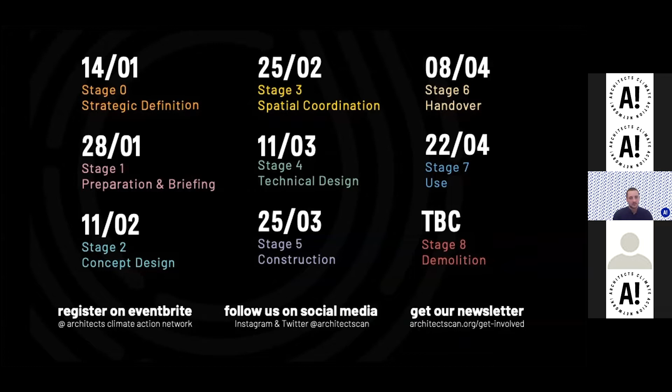For context on today's event, here's a quick reminder of Stage 4 technical design, taken from the RIBA Plan of Work. In Stage 4, the design team further develops the Stage 3 developed design in sufficient detail for tendering and construction assembly activities on site. If the design activities are to be undertaken by a specialist or subcontractor, then the design will need to be developed to a level that allows for this, and the design team may have obligations to check this information or respond to the design queries as set out in the design responsibility matrix. The technical design will include the required construction details, choice of materials, and standards of workmanship.

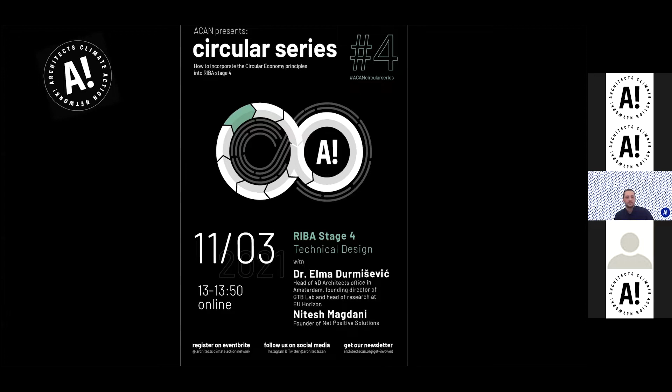So for today's event, we're delighted to be joined by Dr. Elma Durmisevic, an architect who's the head of 4D Architects in Amsterdam, where she has developed 2 EU circular building demonstration pilots, which demonstrate the implementation of reversible circular building design approach in real construction projects. Elma is also the founding director of the Laboratory for Green Transformable Buildings in the Netherlands. This is a platform for circular buildings. She is the founder of Green Design Centre for Southeast Europe and published the first PhD dissertation and book on design for disassembly in Europe. Over the course of 20 years of research with numerous EU projects, Elma has developed tools for measuring circularity and reversibility, which are integrated into the EU guidelines for designing circular buildings. Elma led the EU Horizon 2020 BAMB, Buildings as Material Banks, reversible building research, and is a member of a number of juries and scientific committees.

And our second speaker, Nitesh Magdani, who has over 20 years of experience working across the areas of design, construction, and property development, acting as architect and sustainability expert. He has also had leadership roles at the Royal BAM Group and the Supply Chain Sustainability School. Nitesh works with clients and stakeholders to create solutions towards a net zero and circular economy future. Nitesh developed a circularity economy strategy at BAM, including BAM's engagement with the Ellen MacArthur Foundation, co-authored a publication on circular business models, and has been influential in several circular economy projects, both in the UK and the Netherlands.

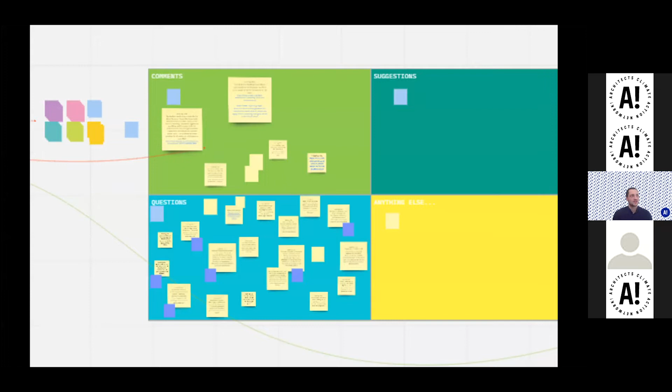Thank you for inviting me to speak at this event and for the time. It is restricted time, so I'll just start immediately with the talk on the subject and ideas I want to share with you and the audience today.

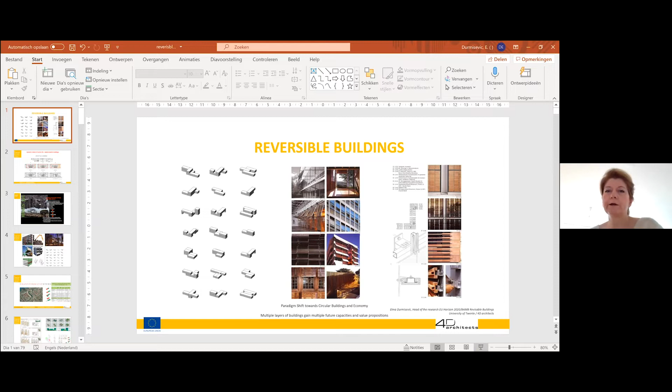So I want to talk about reversible building, as I see that as the new generation of building, the way we should be looking at the built environment if we want to move towards a circular building and circular world.

For me, the reversible building brings a new perception on how we see the built environment. Conventionally, buildings have been designed as static structures, designed for one end of life. That means with every iteration or adaptation, demolition needs to take place.

The reversible building, in contrast, brings a view of a building as a dynamic structure, built up of exchangeable parts and modules which can be recovered, reused, and recycled in new cycles. It sees a building as multiple layers, gaining multiple future capacities and value propositions, which I'll present in these 15 minutes.

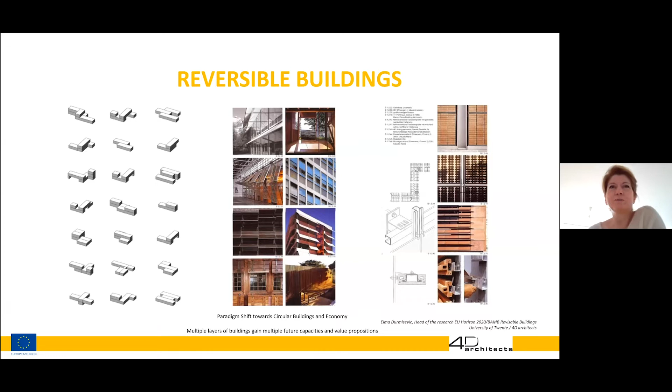I'll try to be sharp. The reason I've been fascinated with this approach, and have been working on flexible, transformable, reversible buildings - we now call them circular buildings - is the fundamental mistake and error I think we've built into our design of buildings and construction.

We see buildings and design them as static structures, but the very purpose of a building is to provide an envelope and comfort for human activities, for human life. Somehow we think all these ever-increasing changes of life and ways of living can fit into that once-designed structure, which is not designed to be recovered, adapted, or have materials reused.

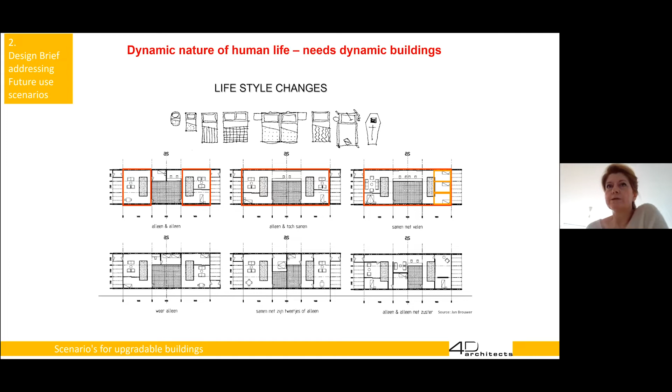I won't go through these details, but I'm sure you all know this results in a huge negative impact on the environment and on economics in the end as well.

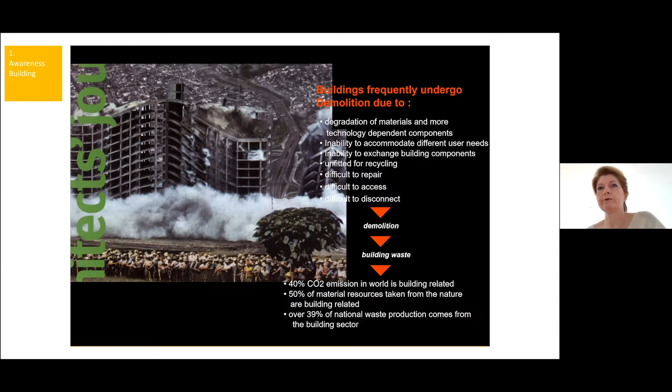So that's what we want to change. That's why we want a new approach where, for me, if I see demolition happening, I'd say there is a design mistake. Demolition is a result of a design mistake. It is at the design table where we define how the building will look, how its configuration will be put together, and how the materials will end up in the future.

If we didn't think through carefully about the future scenarios for buildings and their materials, then demolition will happen. And I hope with all the tools we've been developing in the last decade, we can help take this design mistake away from the tables.

In the future, I think the nice view would be to see the built environment as an upgradable, dynamic environment, where construction is not organized around demolition of buildings anymore, but around transformation and upgrading of buildings, reconfiguring its parts and bringing them back into the built environment again. So that's kind of where we would like to go.

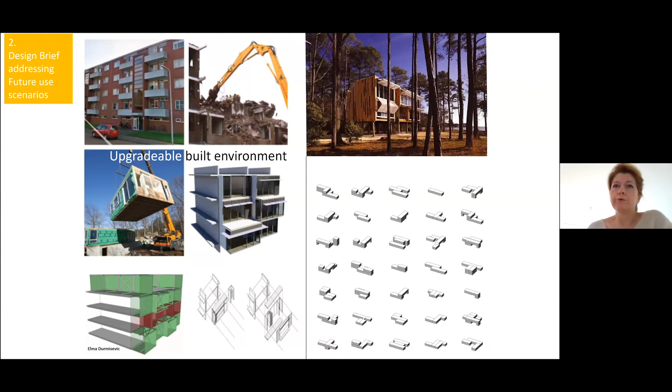But in order to do that, we need changes on different levels, starting from clients as well. When we receive a design brief, we would need to ask clients to come up with a number of design or use scenarios. In this case, I'm showing one project we did in the Netherlands with a Housing Corporation.

We asked the Housing Corporation to provide us a design brief with a number of possible use scenarios, which came out of demographic studies of the city and area, where they looked into future needs and scenarios and what kind of families will be living there. Based on that, they came up with 4 scenarios.

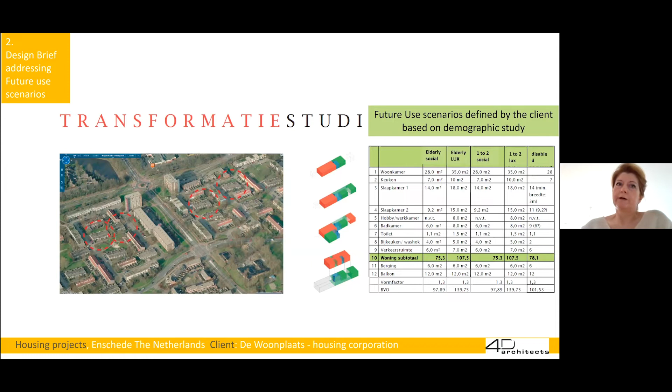When you have options for the future that the client also looks at carefully, you can start developing a system for the building that can live longer, that can accommodate these 4 different scenarios, and does not have to be demolished and wasted, but can be adapted for a next user.

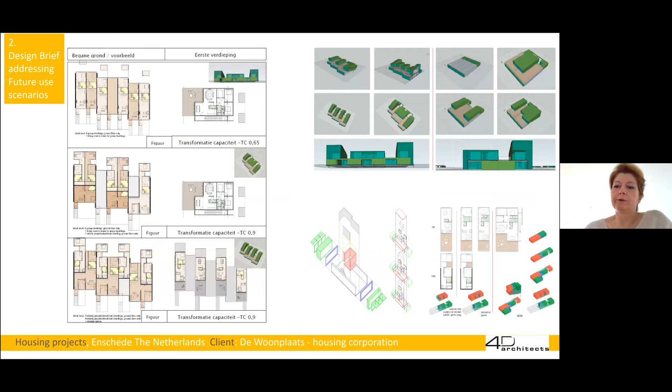But the same counts for the technical parts and systems. That means that in the future, we would need to design systems or units for buildings which can accommodate different techniques, answer different energy performances, and be made and filled in with different materials. So reconfigurable systems, as in this prototype we've done also for extension units.

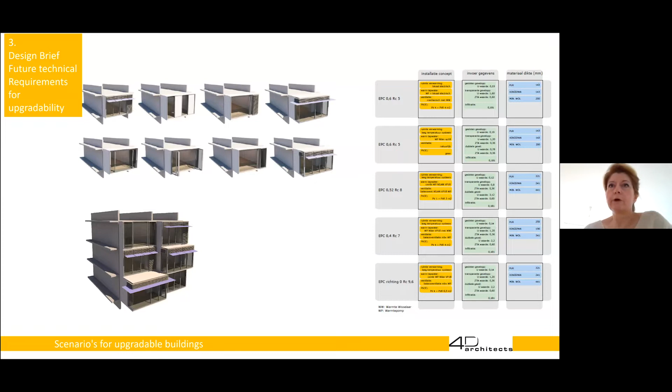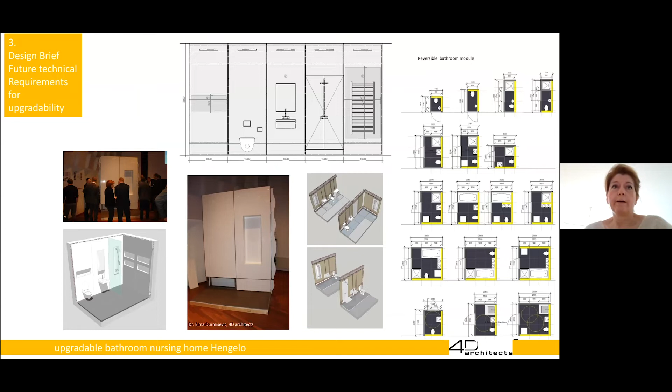In the Netherlands, same counts, just staying on the technical level of systems. Bathroom system, for example, again designed for a nursing home based on a number of scenarios, how the bathroom can be changed over the use of the building as a nursing home, so that you can adapt bathrooms without demolishing them and bringing in new materials.

This brings on new tasks for architects and designers, and the task would be to ensure, in my mind, multiple value propositions of a building through design of multiple dimensions of transformation. And these dimensions are supported by high disassembly and reuse potential.

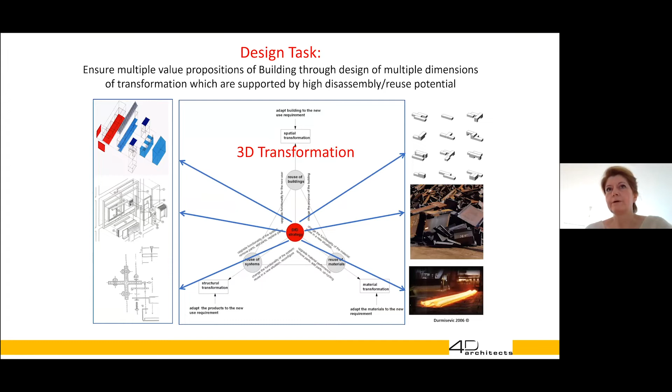That brings me to the 3 design dimensions that I think designers and architects should be looking at when designing future buildings. I call them 3 dimensions of reversibility: the reversibility of space, this adaptation of space; reversibility of structure; and reversibility of material as a 3rd dimension of reversibility.

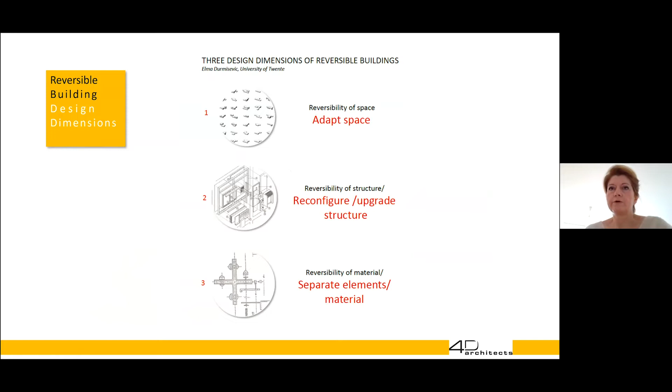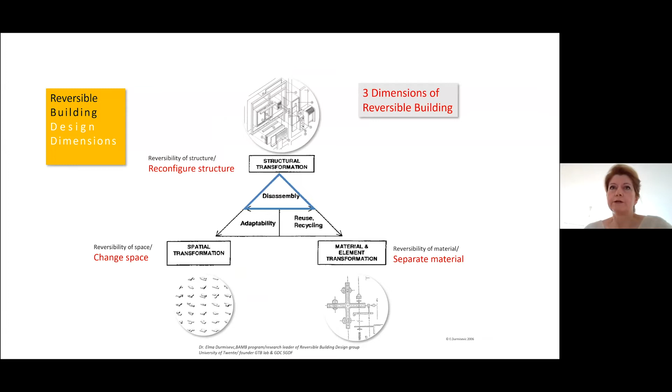These 3 dimensions of reversibility are structured around the core of circular and reversible building, an enabler of circular building, which relies on 2 key pillars: adaptability and reuse, supported by disassembly. This is the main core, and the way we as designers answer these 3 key elements that enable circularity—adaptability, reuse, and disassembly—will inform us on the performance of the building and system in the future.

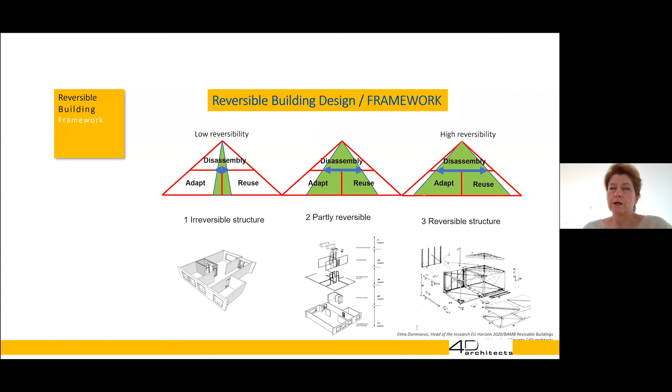By analyzing and assessing these 3 key elements, we can structure the whole built environment and group it into three general groups, from being irreversible to reversible. That was a framework that I developed also for a number of European projects to help move further.

When we talk about future circular buildings, on one hand, we need to design them. Thus we need new design guidelines and protocols. On the other hand, once we have designed and built buildings, we also need measurement tools in order to measure the performance of these new buildings. Because we are talking about new buildings, we don't have means to measure their performances, so we need to develop tools to measure these performances.

So that's why I developed a kind of reversible building toolkit with a couple of basic tools, which I thought were essential to start with. On one hand, developing protocols and design guidelines that will help designers from initial stages to the end to design more circular, reversible buildings.

On the other hand, to support the design, especially the preliminary design phase, the transformation capacity tool has been developed with a supported virtual simulator. It is BIM-based, and technical reversibility is more part of the technical design phase and final technical design phase, which is supported with a reuse potential tool, which also assesses the performance of the design in the end.

So you can improve your design when using these assessment tools. So this is the basic design toolkit.

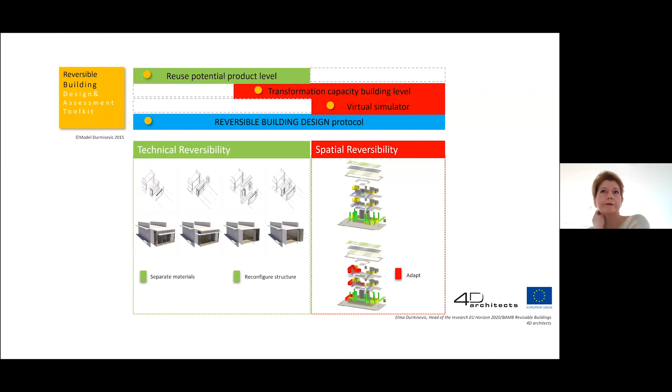When I map it against the three dimensions of reversible design, the first one, transformation capacity, addresses the design of adaptable spaces. It measures the ease to adapt the building and change the function without demolition. It's more on building level.

The other one, reuse potential and reversible BIM, which I'll mention shortly in this presentation, helps go through the final and technical design stages in terms of assessing the design solutions and improving them where needed.

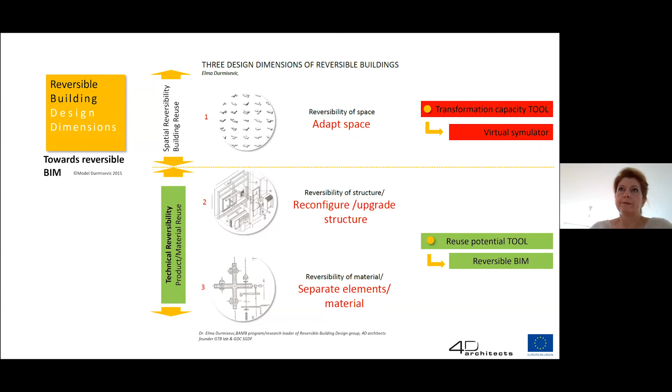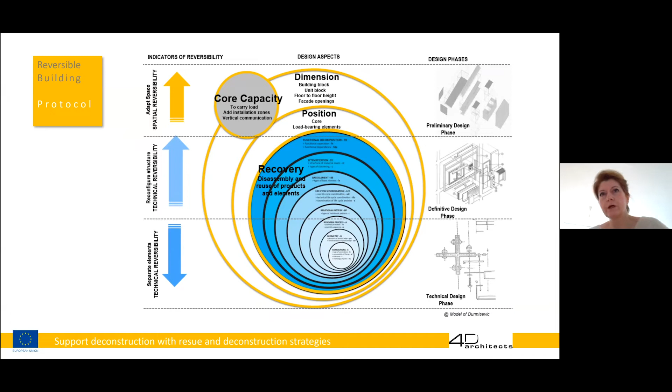The second part, as you've probably seen in one of the slides, is that the building has its spatial parts - I call that spatial reversibility. We need to pay attention to that. And the technical part, what makes the building in the physical sense - in terms of circularity we talk about technical reversibility of the building.

In order to design these technical reversible systems and products, there are three key design domains that the design of each configuration of a product will go through. Those are functional, technical, and physical design domains.

When we want to design for disassembly and for high reuse potential, I developed a model which analyzes three types of dependencies that occur in every product structure. Those are functional dependencies, technical dependencies, and physical dependencies.

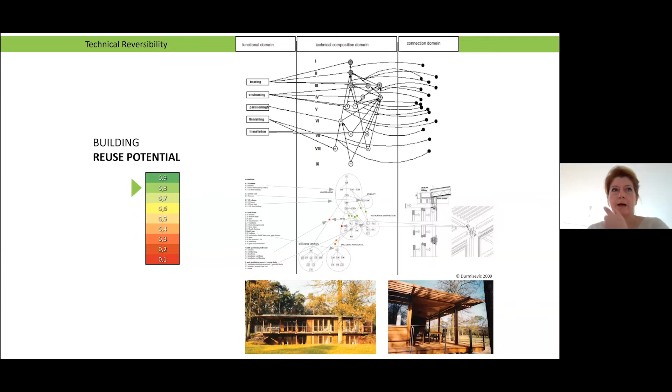The schemes you see here show general information on what kind of analyses take place in these domains. Every product - whether we talk about a building as a product or system, or a component as a product - has these three domains, and within every product structure, or configuration, a number of dependencies occur between parts. These dependencies, if not dealt with properly during design, will result in dependencies that need demolition in the end.

Based on that, I defined 8 design aspects that are related to each of these three groups: functional, technical, and physical dependencies. So where do we need to look, and how can we deal with that?

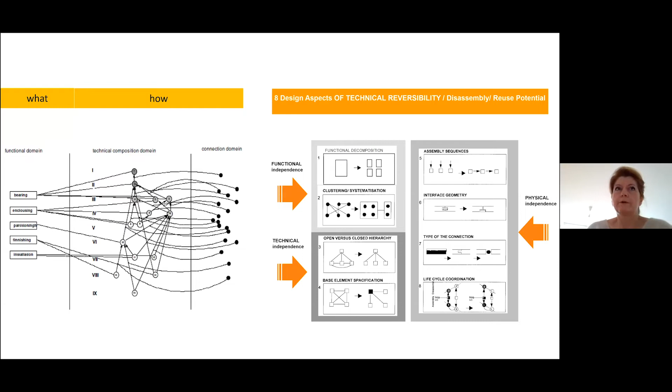I'll go through these few design aspects very fast. But on the other hand, these 8 design aspects are also indicators of reuse potential and technical reversibility - that means by assessing each of these indicators, we measure the reuse potential of the building itself.

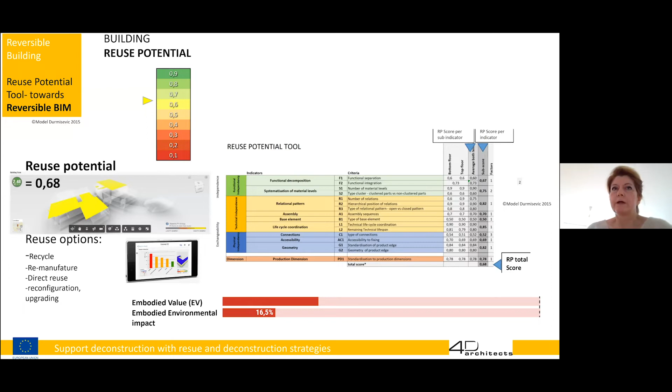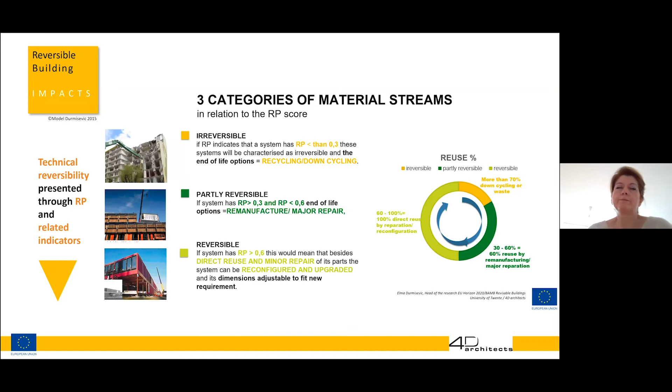The number for reuse potential, between 0.1 and 0.9, is related to the end-of-life options that an element will have. So if the element has a reuse potential of 0.3, that means it will be recycled, for example. So the reuse potential maps reuse options and strategies for materials based on the whole life cycle of the material. That's part of the evaluation.

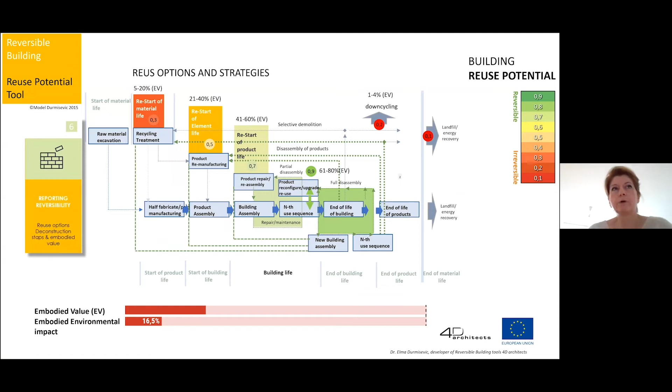Now looking at the 8 design aspects, I'll just run through them. Sometimes visualization helps - something stays in your mind.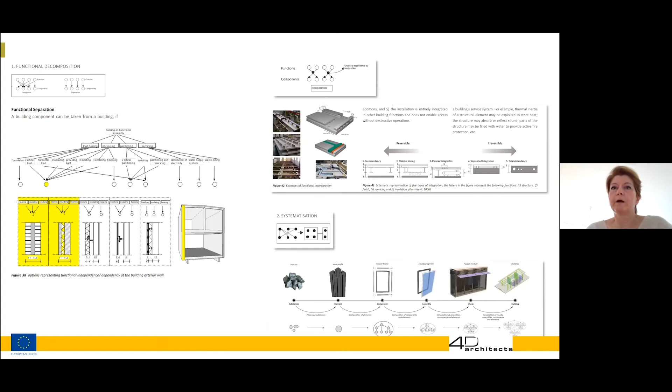When I talk about functional decomposition, obviously the separation of functions on a building level, but also on system level, is something that needs to be taken care of, but also the integration of functions in terms of installation surfaces and structure. Systematization is very much about modularity - how modular is a building and on which level.

The hierarchy and hierarchical pattern which emerges within configurations is a very important part, which plays a key role when we think about taking a part out. As you can see on the left-hand side in the upper corner, a very complex diagram where all elements are interconnected - mainly existing buildings have these kinds of complex diagrams. It means if you want to take one element out, you have to cut 5 or 6 connections - the reason why we demolish buildings.

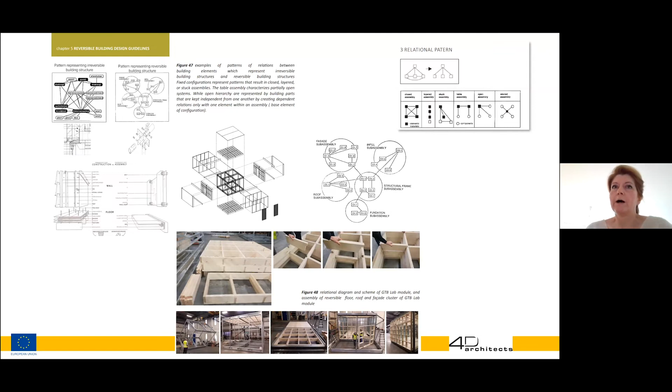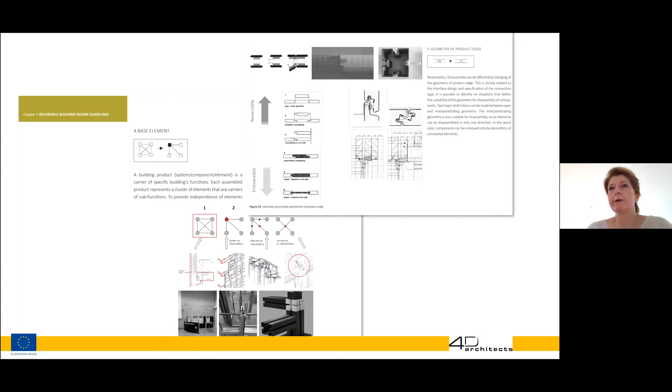The base element specification really helps sort out this complex relational diagram and define a base element in your configuration system that will be intermediary between other elements which have different functions with different life cycles. Product edge geometry is another indicator, which will also sometimes be a barrier for recovering an element without demolishing it or damaging it.

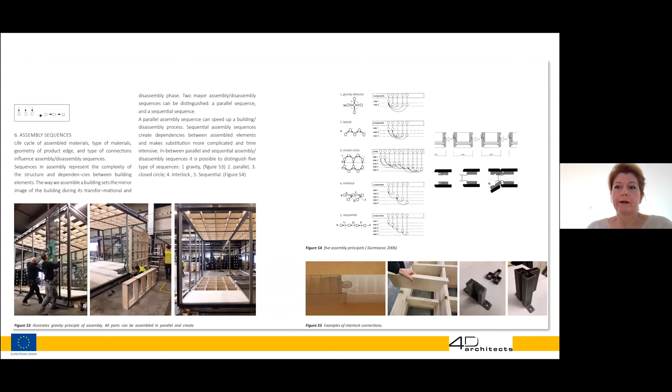Assembly sequences also matter - very often we don't think about that, but the way we design connections impacts whether the configuration is assembled in sequential order, meaning if you want to take one facade out you need to remove 15 elements, or whether it's assembled in parallel order. And the type of connections, from reversible to irreversible, also matters. As a designer, going through these 8 indicators, we can create a net graph indicating which aspects can be improved if we want higher reversibility in a building or system.

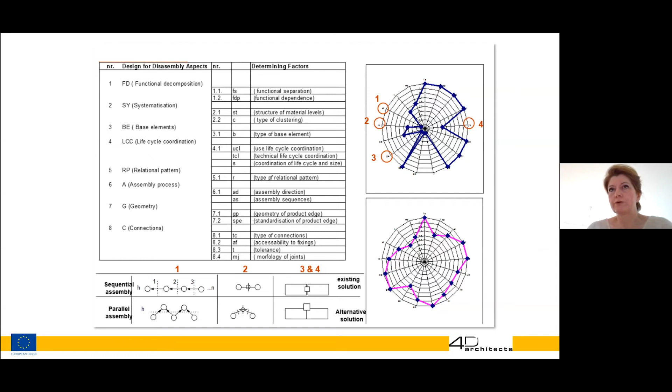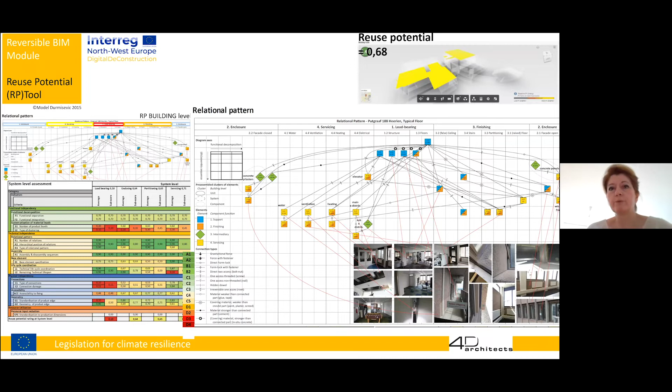This approach is used on one hand as a design support tool, but on the other hand as an evaluation tool. These indicators are used to create a measurement tool to measure dependencies and reuse potential of elements in the building. The 8 indicators, listed here on the left-hand side, have a number of sub-indicators, and the assessment is optimized in Excel to measure reuse potential at building system and product level. It's quite a complex process, I can tell you that.

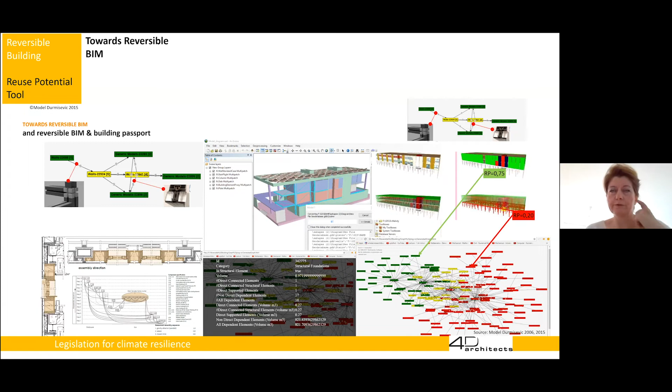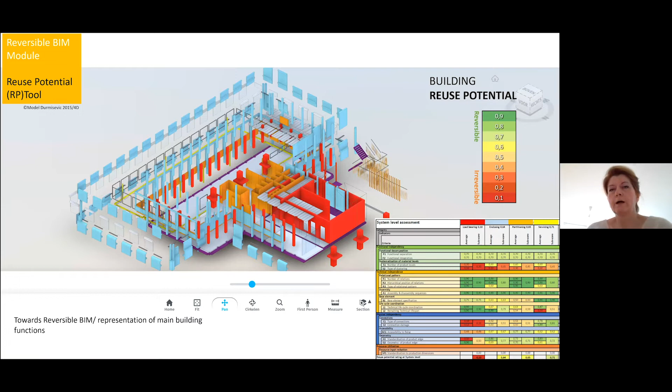That's the reason I started integrating this assessment process into BIM and developed something called Reversible BIM. I still work on it, but we've tested it on a couple of buildings. What the Reversible BIM does, basically - we tested it on an existing building by scanning it and getting point cloud files, then creating the Reversible BIM according to the reuse potential methodology, functional decomposition, and so forth. This is the basic model we use to add plugins which we developed as well.

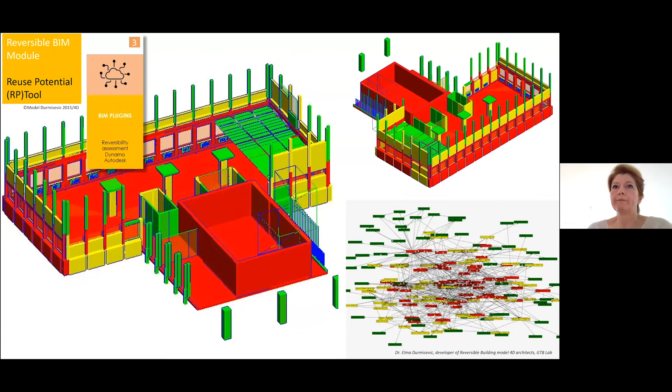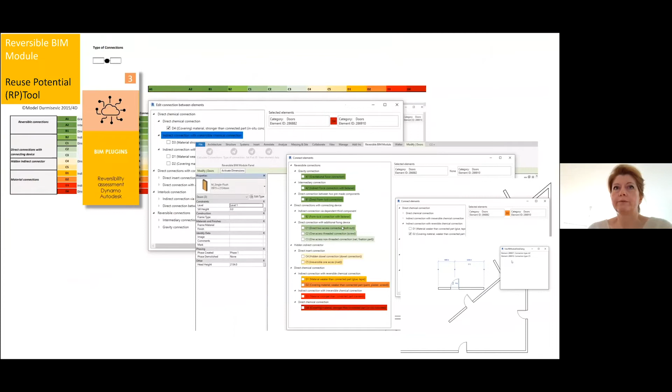Plugins analyze the number of connections within elements and color them - elements with up to 3 connections are green, more than 7 are red, and that's presented in the model itself. We also developed another plugin for connections to analyze the types of connections, also related to color coding, all tied to the reuse potential methodology I mentioned previously. Putting it all together, reuse potential is calculated and color-coded files are created for viewing.

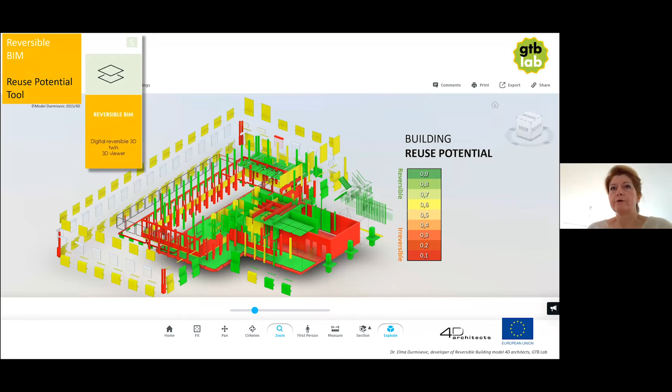When you click on each element, you get your reuse potential scoring, which helps give an idea of how many elements in a building have high reuse potential. It's quite interesting for construction companies - they can create deconstruction strategies based on this analysis.

But for architects in the future, we're thinking of developing a 3D library of BIM objects, so elements with high reuse potential can be directly used in new designs.

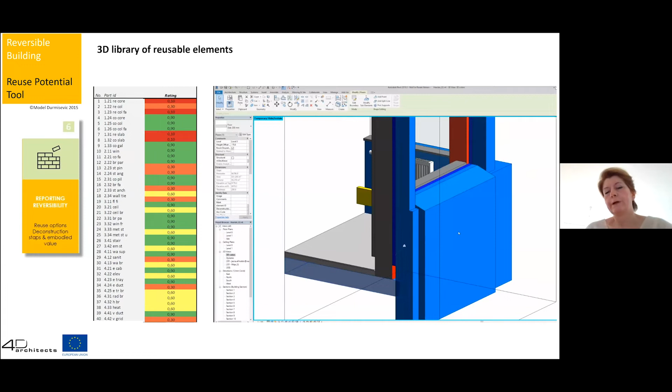This Reversible BIM is now being integrated into a platform called the Digital Deconstruction Platform, together with 3D scanning, digital material passport, and blockchain, to support decision making - mainly for building owners and construction companies - to define their reuse and deconstruction strategies in the future.

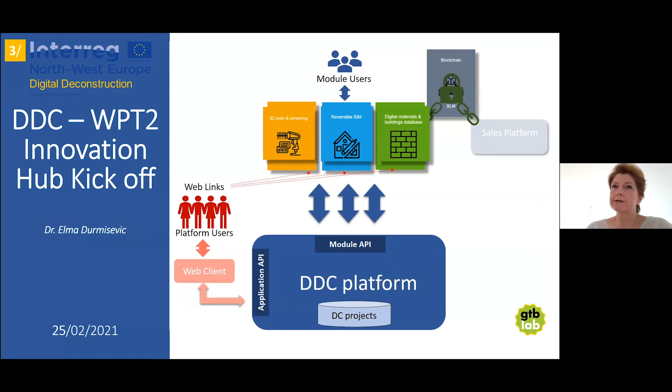So that's how the assessment looks, and how it looks now in BIM as well.

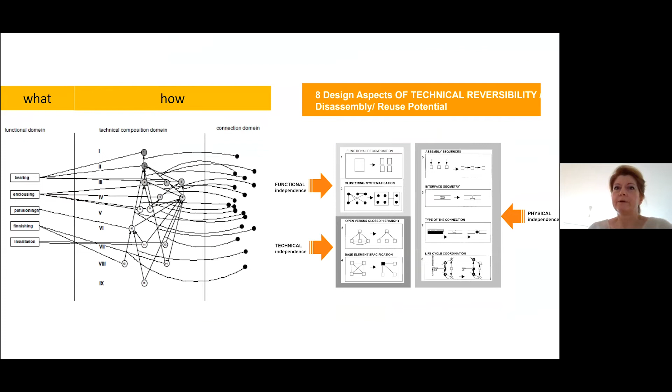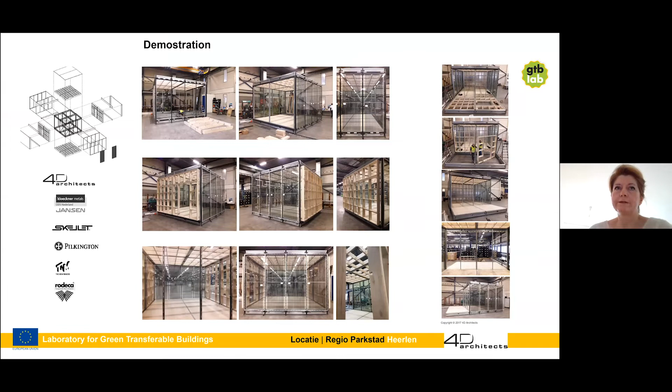But I think more importantly for designers is to look into what implementing these design aspects can mean. That's why I have a couple of slides of demonstrators showing the results of a design process where these 8 indicators were consequently integrated through all design phases, creating modules with independent parts and systems, going back to independency and reversibility - not only of major components of the system, but also reversibility of subsystems.

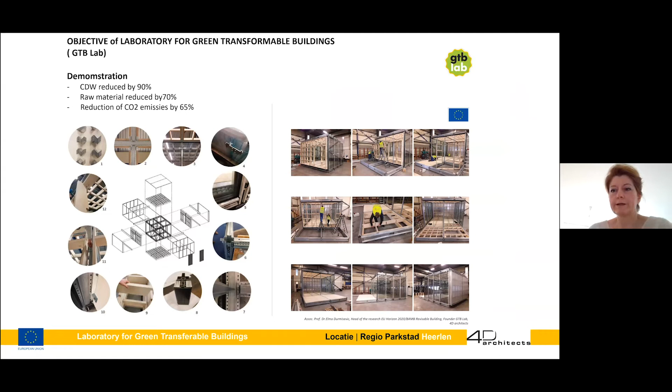What you can see here is we transformed this module, for example, into a model with a terrace, where the facade has been reversed and became a terrace, and the door is no longer a door, or becomes a window, or something else. Everything is done without any additional screw or material used.

This also brings us to think about new materials, new geometries, new connections, and this is one of the connections I've been working on with Jansen and ODS, obviously trying to bring in new products which will help future reversibility of buildings or improve these.

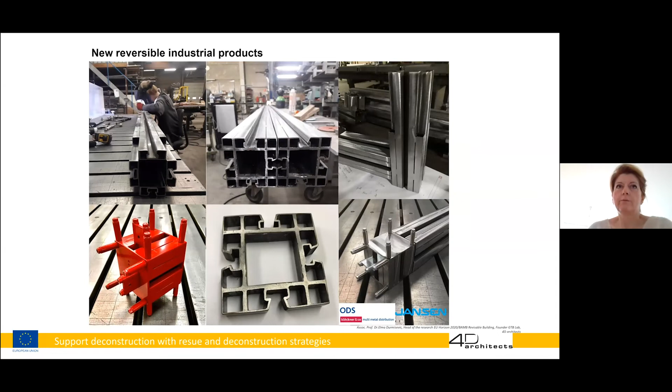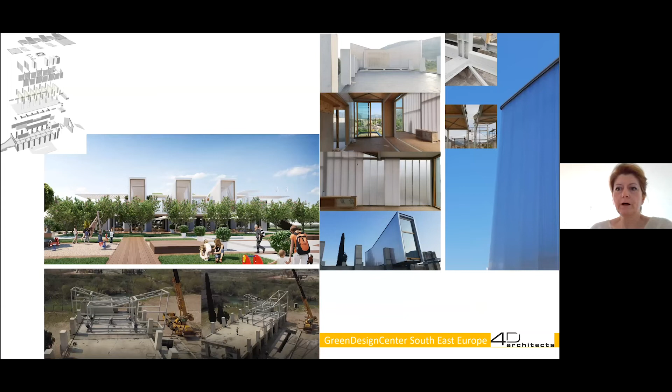So new products need to be developed as well, or new systems. This is a bio-based facade system, also following these 8 indicators, for the design of a whole building as a green design center - I have here a laboratory for green transformable building, which is under construction at this point.

So this - I don't know how many minutes it took. I hope not too many. This is my last slide.

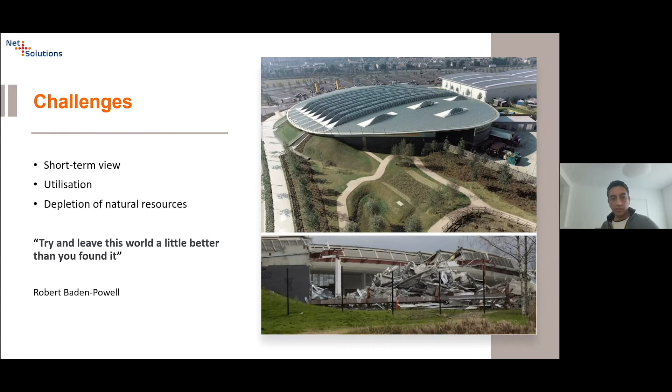Okay, so a couple of examples or case studies, let's say, from my time at BAM. So Circl in Amsterdam, it was a building for ABN AMRO, the bank, and they basically wanted to invest in sustainable investments. So they had, I think, 2 million euros that they had to invest by 2020 or something. But to do so, they needed the evidence base, and they wanted to demonstrate what circularity was.

So we went on this journey with them, with an existing architect, and the design at the time was all concrete. It was pretty much a concrete box, and whilst it looked really elegant, it wasn't designed around life cycle thinking. It wasn't designed to be reused. So we did look at reuse, take back, performance contracts, etc. And we didn't try to make it a fully circular building in one sense or the other. It was just a case of testing different theories.

So we got involved quite early, together with the supply chain, getting others involved quite early on, whether they were BAM's original supply chain or more likely, suppliers that we hadn't worked with before. And we really focused on how to get the best value in a project. So we put together a procurement evaluation matrix, basically a spreadsheet. It's not as sophisticated as Elma's approach, but it worked. And it was really just around having that transparency between all the different players around the table.

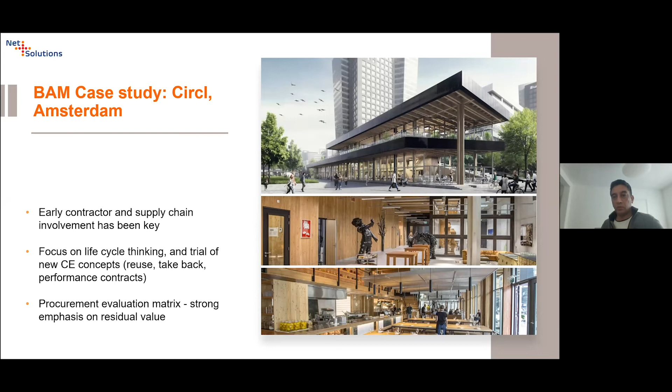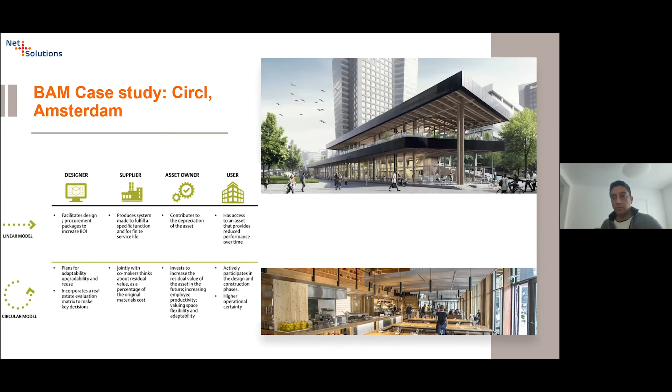And also we published a report through the Ellen MacArthur Foundation called Circular Economy Business Models in the Built Environment. And that was to basically demonstrate that if you take a linear model and convert that to a circular model, how does that change the incentivization or the benefits to the designer, the supplier, the asset owner, user, etc. So that was quite a good case study really in terms of just identifying the value proposition, not just for the end user, but for understanding what the designer needs to do to change, to shift from thinking about things in a linear way to circular.

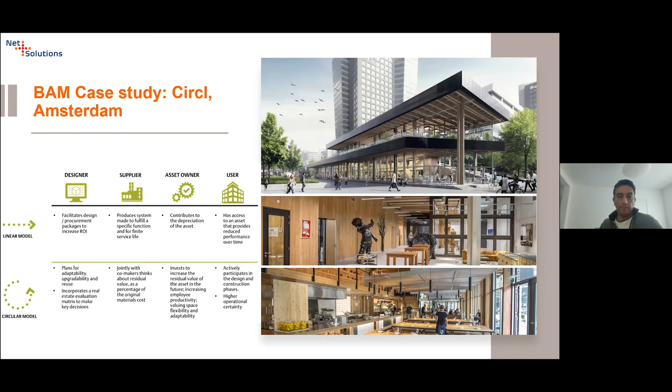Another project was the circular building, which we constructed in London. And that was just outside the building centre in 2017 for the London Design Festival. So we did that with Arup, the Built Environment Trust, and Frener & Reifer and BAM. And basically we focused on design for reassembly. So again, just as with Elma's presentation, we were not focused on design for disassembly.

We were focused on how do we design something, let's say the waterproofing, FATRA waterproofing. We had various design workshops with them to ensure that we could design it using their products, as well as all the cradle-to-cradle products that we used elsewhere, disassemble those elements and then be able to reuse them again in a different situation.

So that was quite eye-opening, just as a process, because there was a lot of workshops and just thinking through, not just how do we put this together, and we're not trying to glue it all together, but we want to design it so that it can be used again. And it did need that commitment from the whole team to understand the business models for them. So some of the discussions were around getting them to understand the remanufacturing process if they were to take the material back.

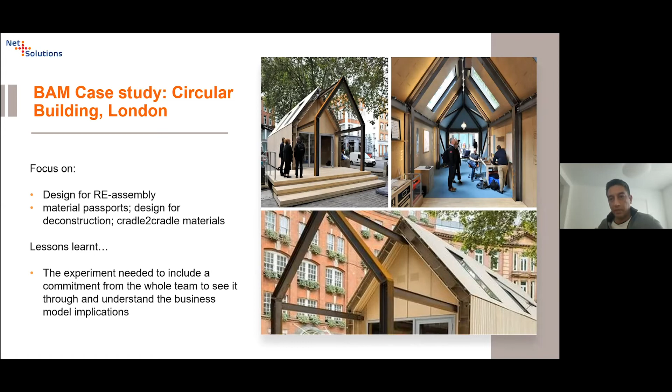Another project, which I think is the last one I'll show you, was a huge property development project that BAM are doing now. A few years ago, they bought the site for 85 million euros, with a master plan designed by SOM, I believe. This was a bid put forward to the Amsterdam City Council, and 50% of the acquisition of the land was based on quality.

That goes to show the change in mindset between the UK and the way we procure for financial gain, very short-term thinking, versus in the Netherlands, where we were incentivized to put forward a bid that was very high on quality and life cycle thinking.

So we focused on getting as much of the existing land as possible. At the moment there's a prison that's been there for 30 to 40 years, made out of concrete and steel bars. We're looking at solutions with various concrete providers for how we can demolish, reuse, or take down the concrete panels and reuse them, whether crushed as aggregate or reused in their original form as panels. The jail bars will become balconies or bridges.

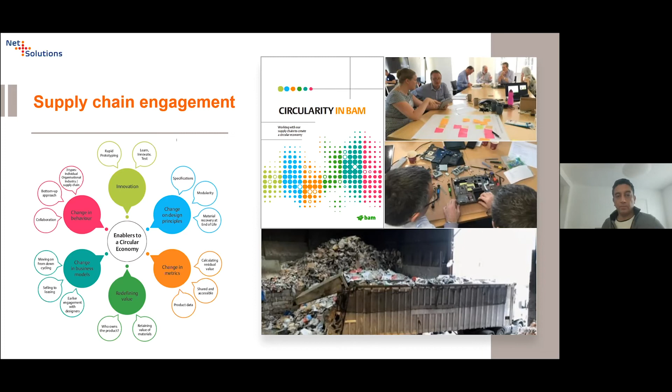Our tender actually went in discounted by that 20%. So again, we won the job based on the fact that we were the cheapest over that whole life cycle. We also produced total cost solutions, agreed profit share. So having that open book policy where you can talk around the table with the client, and actually say, look, yes, we're going to invest our time doing a little bit more R&D, looking at materials that can be reused again.

So we used a Philips headquarters in Eindhoven that was going to be demolished. We used the timber facade, so it was timber glazed windows. We used them for internal partitions in the ABN AMRO pavilion, and also at the pavilion we instigated a review on higher residual value of materials. So again, looking at the materials that we would use on day one, and making sure that after 25 years that they were actually worth more than the standard products that you'd normally build with.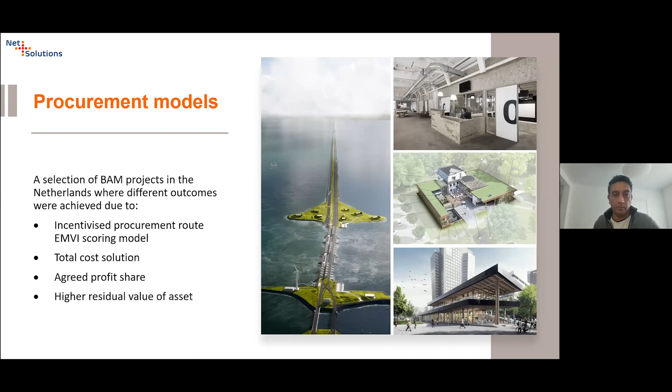And then I think I'm out of time, but just to leave you with a few opportunities, whether it's looking at digital material platforms, which we've done, or looking at different sharing platforms, different types of contracting, so performance contracting, translating material waste into value, closing the loop, remanufacturing, as I touched on before. And essentially there are benefits for the whole team, and it's really around understanding it. And I think, as also just to reiterate, as Elma said, it's probably not, it's quite complicated, it's quite complex to look at circular economy, but I'd say it's fun as well. So I'll leave it there. Thank you.